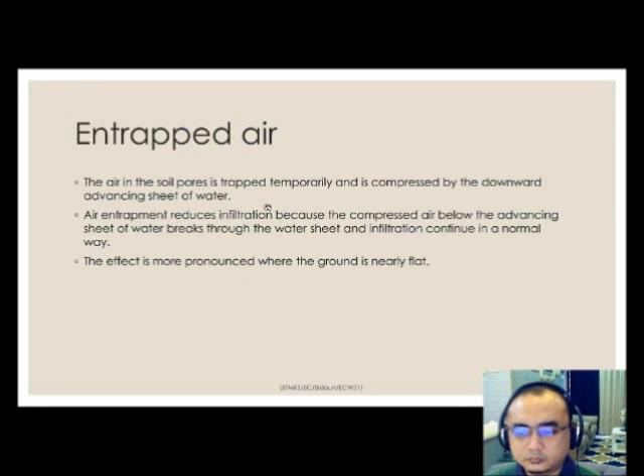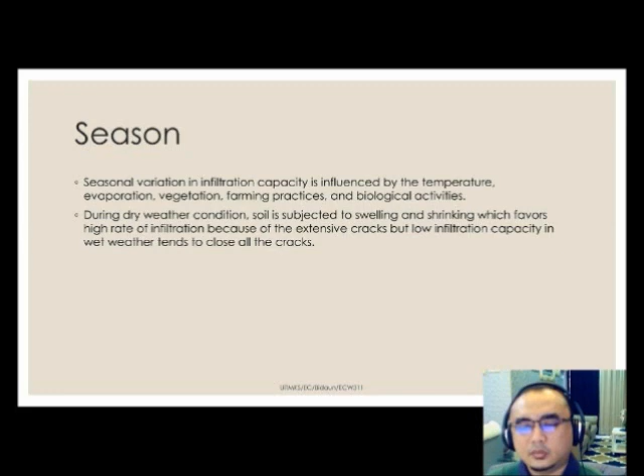And the last one is man action, ataupun apa yang dibuat oleh manusia. So apabila berlaku perubahan ataupun modify of surface condition of land and its protection against rain. Most significant change is due to building of structures on the ground surface, for example road, highway and parking lot.

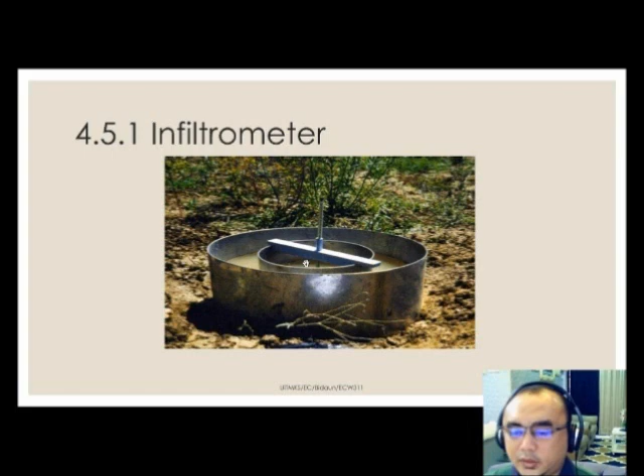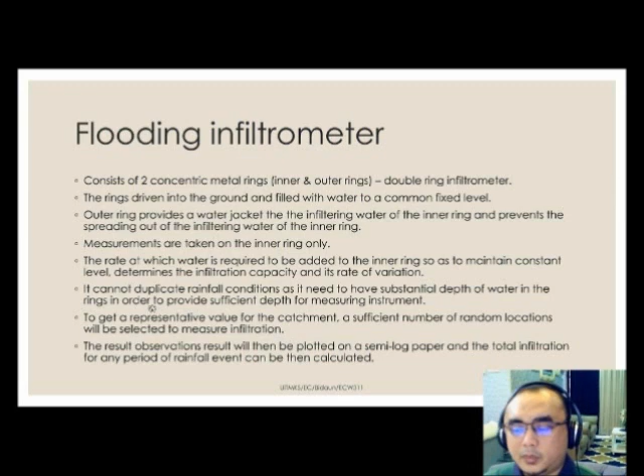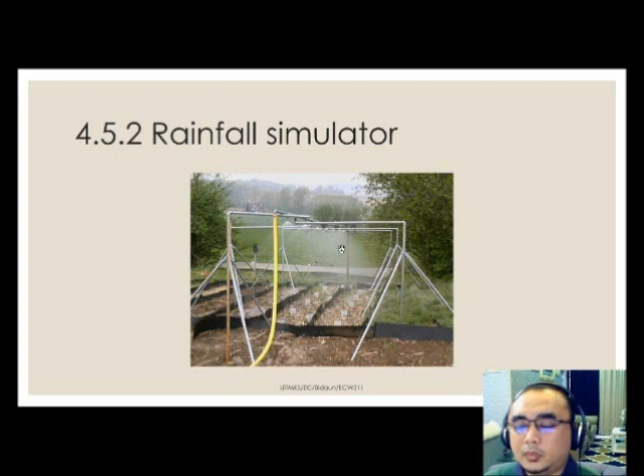It provides rainfall impact and turbidity of surface water which cannot be considered in the flooding infiltrometer. It gives lower rate of infiltration for the same type of soils and vegetation compared to the flooding infiltrometer.

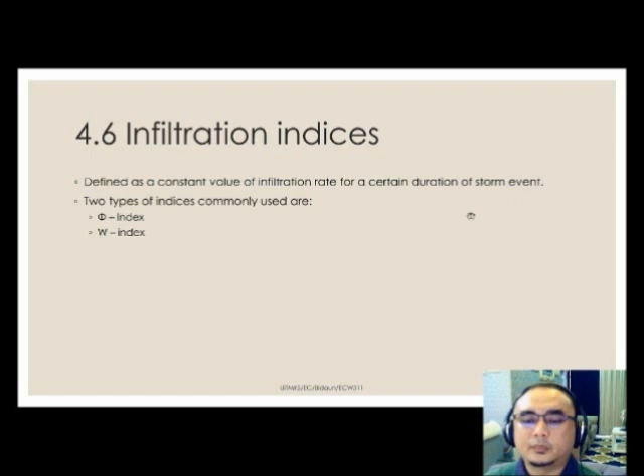Defined as the constant value of infiltration rate for a certain duration of storm event. Okey, kita tengok dulu phi index. The mean infiltration rate is rainfall intensity above which the rainfall volume equal to the observed runoff volume and also equal to the total infiltration. So, phi index ini adalah total infiltration kita bahagikan dengan rainfall duration. Phi index represents the combined effect of interception, depression storage and infiltration.